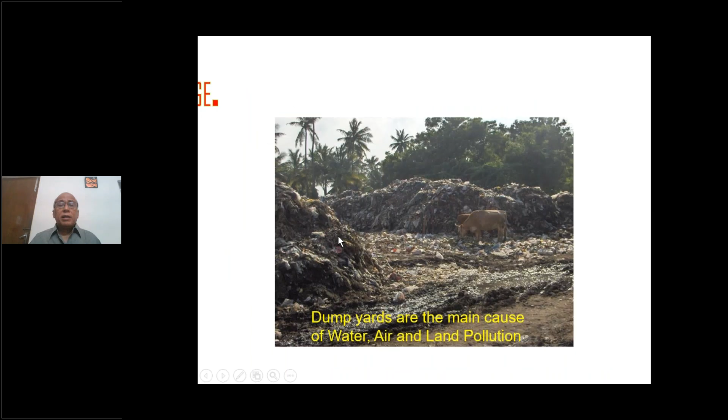Now, the biogas plant is microorganism based. We have all come across this. Biogas, gobar gas, is something that we started off with about 20 or 30 years ago. A lot of gobar gas plants were put up. The process is very, very similar to that. Now, biogas can be made from a lot of inputs: kitchen waste, food waste, plant waste, that is agricultural waste, animal waste, and all these things. We will go over these one by one.

This is something we would like to say: initially it was Stone Age, Bronze Age, and now garbage. We brought this up for a simple reason. Biogas can also be made from the organic part of municipal solid waste, garbage. Dump yards are the main cause of pollution, especially the organic part. The other parts can be recycled. So we can always convert this also to biogas.

Typically, we go by three types of waste: biodegradable waste, non-biodegradable waste, and non-combustible material. In the non-biodegradable part, there is a combustible part and there is a non-combustible part. Our discussion will center only around the biodegradable part. For this particular presentation, we are not concerned about the non-biodegradable part.

When it comes to biodegradable, most organic materials degrade over time. Some things degrade faster and some things don't degrade as fast. For instance, fibrous materials like coconut fiber, drumstick fiber, or fiber of banana leaves take a little longer to degrade compared to material like cooked food waste or vegetable waste. So strictly speaking, it is not a question of time, but the discussion will be on the fast degradable material, and we will try to avoid things that degrade over a longer period of time, like what I just mentioned.

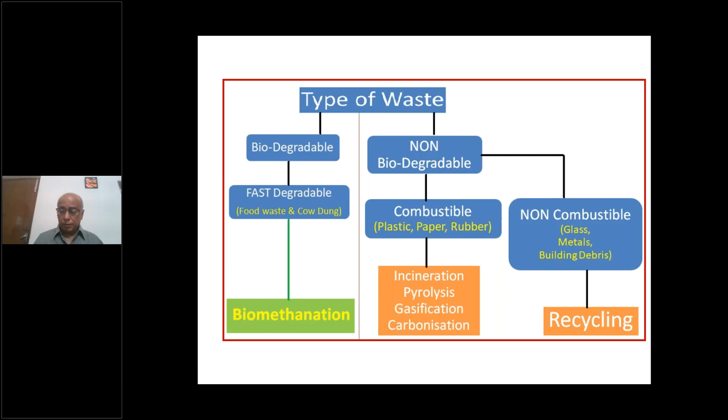So the idea is we want to convert. See, today India is a huge importer of fuel, especially fossil fuel, and it is also a huge outgo of foreign exchange because of that. So the idea is to convert whatever is possible to be converted into fuel, at the same time also minimizing the environmental impact, which is the most important part of these gases.

For instance, if these materials which we are trying to convert to biogas are left in the open, the same methane that we are converting here will also occur in nature. And for your information, methane is 20 to 21 times more harmful to the atmosphere compared to carbon dioxide.

So what we are in effect doing is, strictly speaking, minimizing the impact on the environment, and at the same time converting it to a fuel, and also reducing the CO2 that would otherwise be emitted by using fossil fuels for the same application.

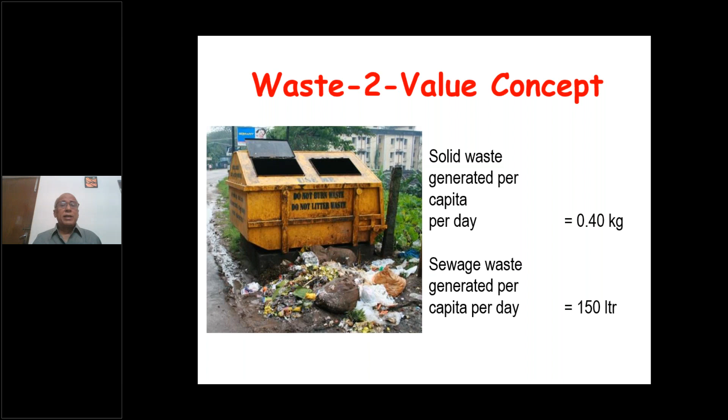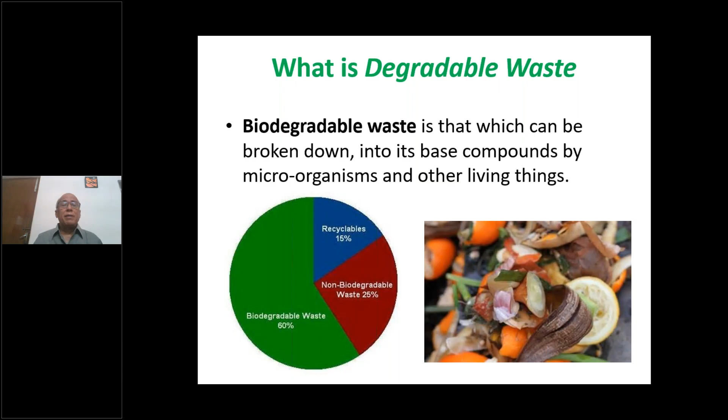So what is biodegradable waste? Something that can be broken down into base compounds like carbon, hydrogen, and oxygen by microorganisms and other living things. So this is what we really are looking for when we say biodegradable waste. Things that can be degraded by microorganisms. So I mentioned to you what is fast degrading and what is slow degrading.

Food waste generally remains of balance of cooked food. You cook in your kitchen some of the food, the vegetable peels and some excess rice kanji or excess rice. These are all part of your day-to-day life. It may be large in volume or less in volume, but there will always be some quantity of food that gets left over in your house, or maybe in a canteen, or in hotels.

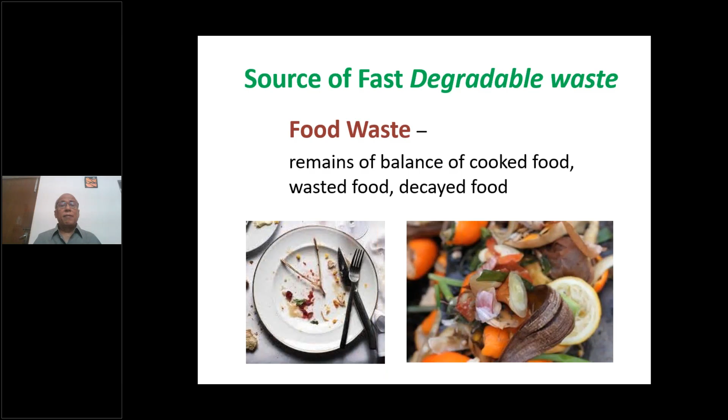So this is one important input, although we are not concerned about this, we are coming only to the agricultural part. So this is one input for the biogas plants. Similarly, water waste: washing of vegetables and grains, the plate wash, the hand wash, and also water waste that comes out of your toilets, if it is not contaminated with your cleaning liquids, can be an important source. What we call biomethanation of night soil is another important raw material for our biogas production.

Then animal waste. This is again very important. It may be part of the agricultural part, as animal husbandry we still believe is under the agricultural heading. So cow dung, chicken litter, fish litter, especially cow dung and chicken litter, also constitute a very important input in converting to biogas. There are already plants, gobar gas, of course, we have all heard of.

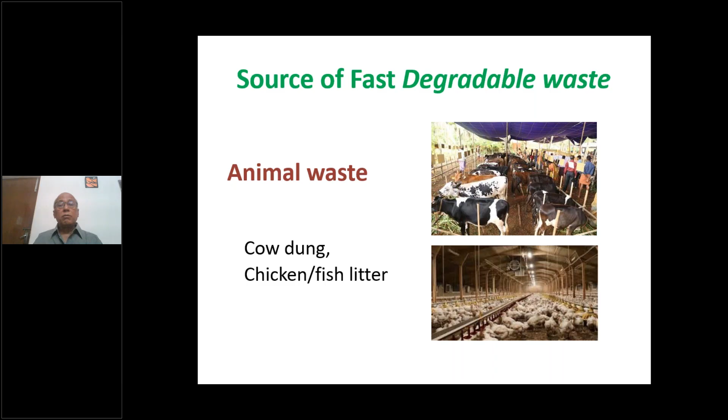Chicken litter has also been converted very efficiently into biogas, and quite a few plants are operational now, even in Tamil Nadu, especially in and about the Namakkal area where chicken is grown in abundance. They are among the largest chicken egg producers in the country today. So in those areas, chicken litter has already been converted to biogas. Cow dung has always been converted to biogas. So this is one important agricultural waste that can be an input for conversion to biogas using the biomethanation process.

Human waste. I mentioned to you, stools, urine. These should be chemical-free; flushing should be ensured. So as I mentioned, if it is not contaminated, going by the good old practice of having a septic tank with no chemical inputs for the cleaning, that would be an ideal method for conversion to biogas.

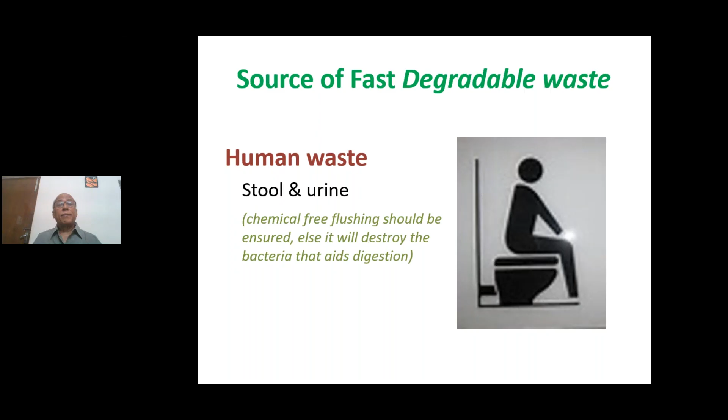Agri-waste is relatively slower degradable compared to food waste and animal waste. Vegetable and fruit waste, strictly speaking, are borderline, meaning they are not very slow, reasonably fast, but not as fast as animal waste. Cow dung, for instance, is highly biodegradable compared to vegetable or fruit waste. But vegetable and fruit waste are a very important component in today's lifestyle, so that would also be a very important input to consider in our conversion aspects.

Similarly, people may want to know, can agricultural residue like rice straw or wheat straw or grass and garden trims be converted to biogas? Yes, they can be converted to biogas, but when they are fresh. If grass is dried, then it may not be an ideal input for biogas conversion. Similarly, dried wood and dried twigs are not ideal candidates. In fact, we should not be putting them at all into the biogas plants.

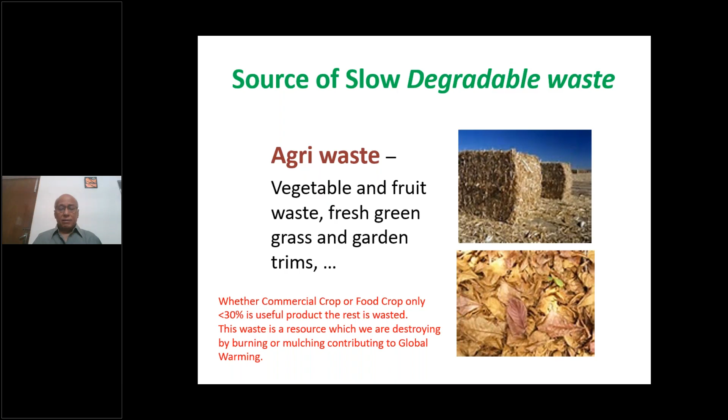Similarly, waste paper can also be used, but in smaller quantities along with other input raw material, not exceeding 5%. So that can also form an input in the biomethanation process.

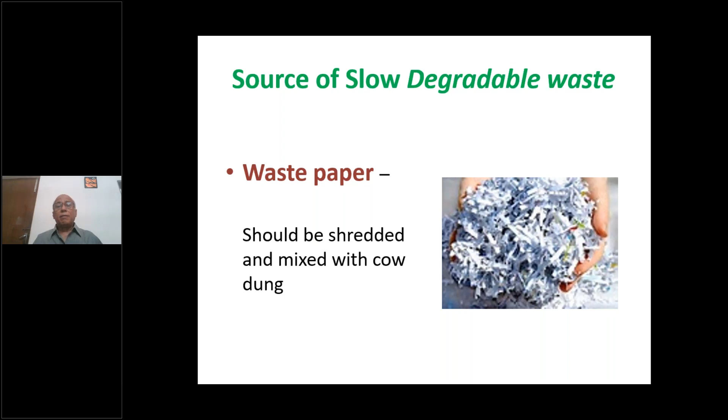As I mentioned to you, municipal solid waste, if it is segregated into organic and the inorganic part, then again, it can be used as a material. In fact, there are lots of plants which are operating. Even Chennai has a plant of 100 tons per day. They are not operating to full capacity now, but based on organic part of the municipal solid waste. And quite a few of these corporations are now in the process of segregating the wet waste and the dry waste, what you call source segregation.

So if source segregation becomes highly successful, which I'm sure is going to happen in a period of time, then the scope for biomethanation of municipal solid waste is tremendous. So probably a few years from now, that will again be a very, very important source of biogas for communities.

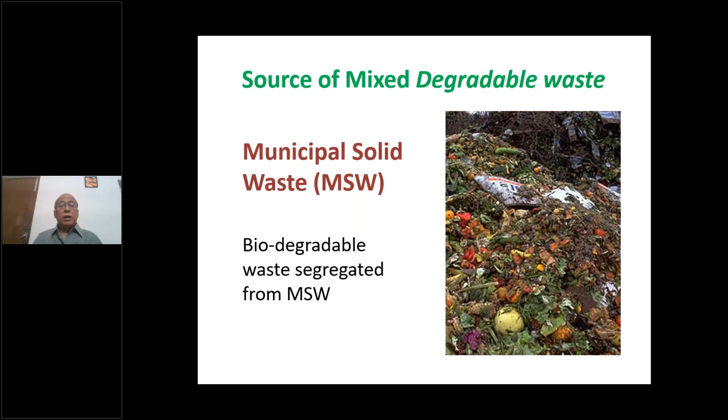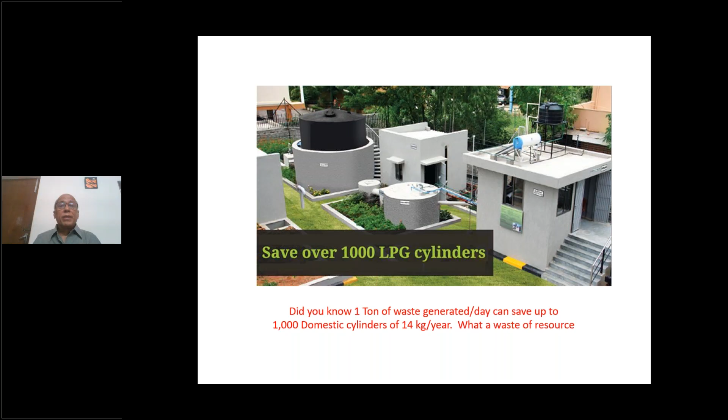So typically what you see, the picture here is a biogas plant that is operating in Wipro. Quite a few people will be wanting to know whether these biogas plants will be very messy, will it be smelling, and all those things. So typically you see this picture here. This is at the entrance of the Wipro campus in Bangalore. So this is typically a process of biomethanation. Let me go over this one by one.

First, the input material, whether it be fruit waste or vegetable waste, it is crushed. The crushing is to a size of about 1 to 2 mm, very small pieces, so that a large surface area is available for the microorganism to act. So you are trying to speed up the process of degradation. So the first step in the biomethanation process is to make the input homogeneous as much as possible by crushing it.

And the kind of crusher that you use will depend on the input raw material that you have. If it is food waste, then you will have a crusher. If it is going to be a little more of agricultural waste like grass and things like that, maybe you may want to have some kind of a tearing mechanism, shearing. So you will have a shearing kind of crusher there.

Now, the process that we generally employ, if you look at the conversion to biogas, the first stage is acidogenesis, meaning there is one set of bacteria which converts the organic matter into an organic acid. Now, that can happen even in the presence of air. Then in the second part, the acid is converted by a different set of bacteria under anaerobic conditions, anaerobic meaning in the absence of air, to methane. So there are two definite steps in the process of biogas production.

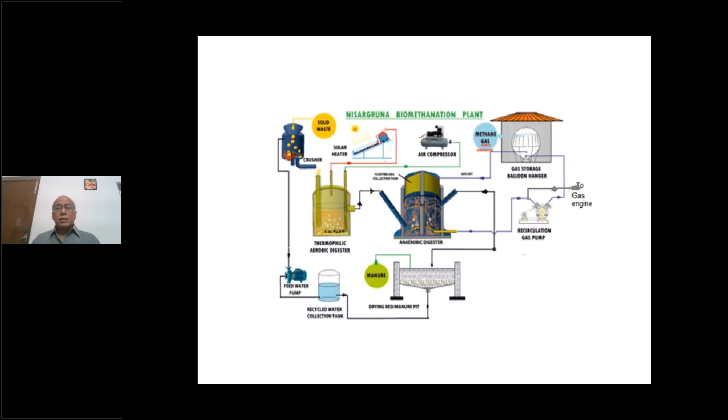So ideally, instead of maintaining a high temperature, which means putting in energy, around 35-37 degrees is the normal temperature at which the digester is maintained. Now, coming to the gas that comes out, it is stored in balloons, so that it can be at different capacities. So typically it is stored in balloons and then used in any end application that you want to use it for.

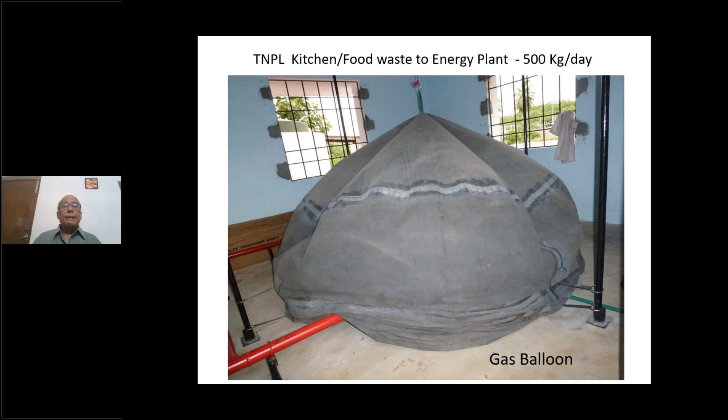So this is typically the biogas composition: 65 to 70% methane, 30 to 35% carbon dioxide. Hydrogen sulfide is another component, something that you don't want in the biogas, but it will happen depending on what input you are putting in. In some cases, we use it without removing H2S, but in other cases, we may have to remove the H2S. For instance, if you are going to use it only for cooking in stoves in kitchens, we generally don't recommend any after treatment. We just store it in balloons, remove the water, and send the gas directly to your kitchen stove.

So there are special stoves which are designed to operate on biogas containing about 55-65% methane and CO2, which will give you a result, depending on the size that you choose, as good as your LPG stove for kitchen application.

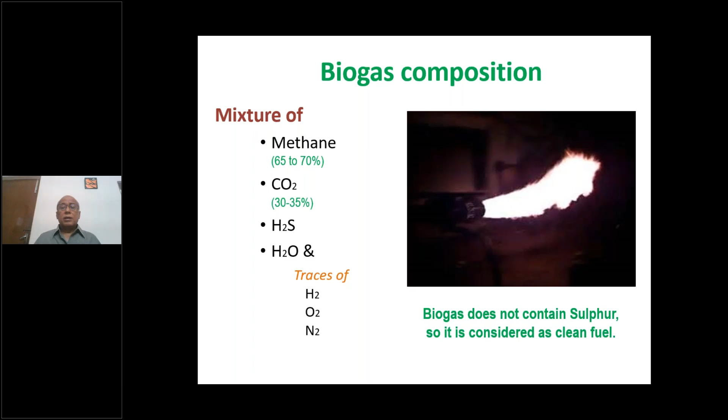In some other cases, for instance, today there is a nationwide movement going on, and the oil companies have taken a lead in this, to use biogas as a transport fuel. It is called SATAT, and all the leading government oil companies are working towards having compressed biogas, which will be retailed in their own pumps and sold as biogas for your vehicles. Today you have seen auto rickshaws running on gas, CNG. Compressed biogas and compressed natural gas are almost the same. Both contain about 90% to 97% methane.

So when I say compressed biogas contains 97% methane, since the gas coming out of the digester contains only 65%, you have to literally upgrade the gas from 65% to in excess of 90, up to 94, 95, even 97%. That means you will have to remove the H2S, and you will also have to remove the carbon dioxide from the biogas. So there are standard processes available, which we call the pressure swing adsorption method, and scrubbing the H2S to bring it to less than 20 ppm. H2S is brought to less than 20 ppm, and the methane is upgraded to 94-95% to be on par with compressed natural gas. So this is what we call bottling of the biogas.

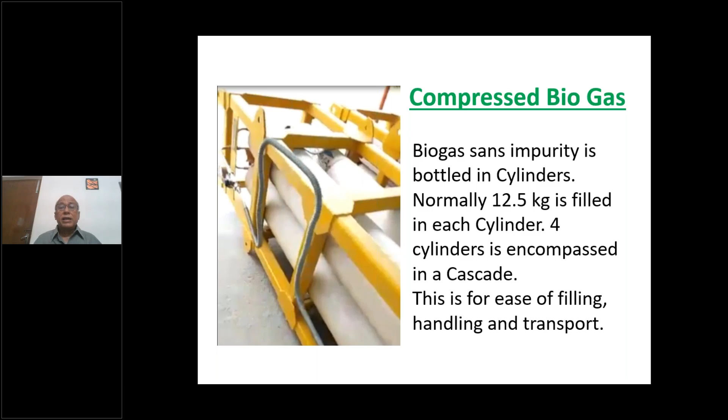The biogas is bottled at very, very high pressure, because unlike LPG, which is liquefied under pressure, methane does not liquefy under pressure at normal temperatures. So we are going to compress the biogas up to 200 kg per centimeter square. That is 200 to 250 times atmospheric pressure. So it is really high pressure compression.

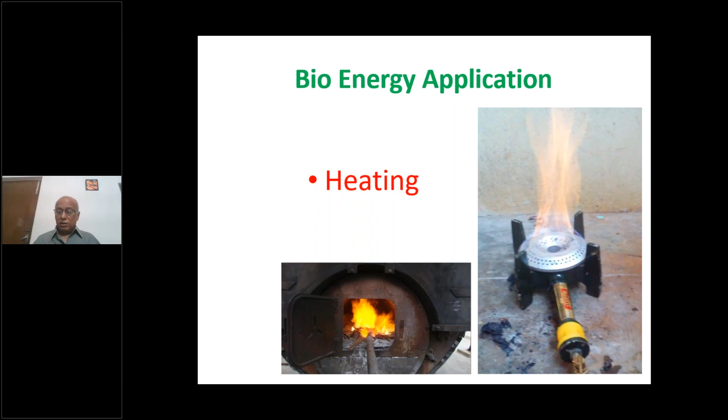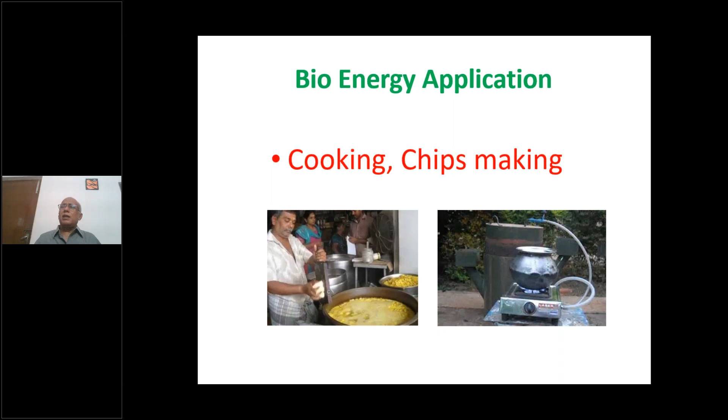Then the application of bioenergy for heating. You can use it in heating. You can use it in boilers. You can use it in kitchen stoves. You can use it for chips making, all industrial processes. Any industrial process where LPG, CNG, or diesel is used can be replaced with biogas, either in its natural form or compressed form, depending on the end use application.

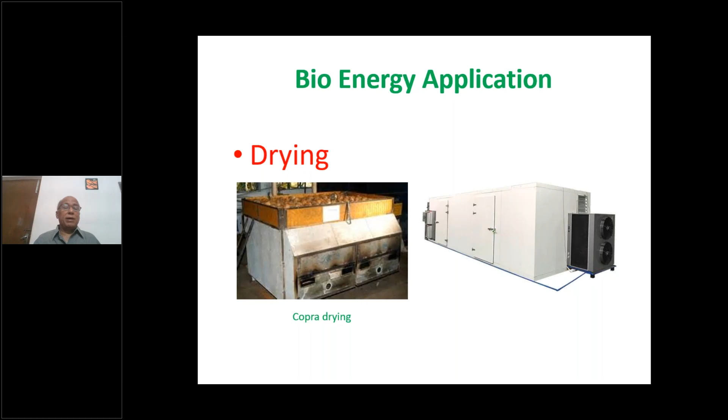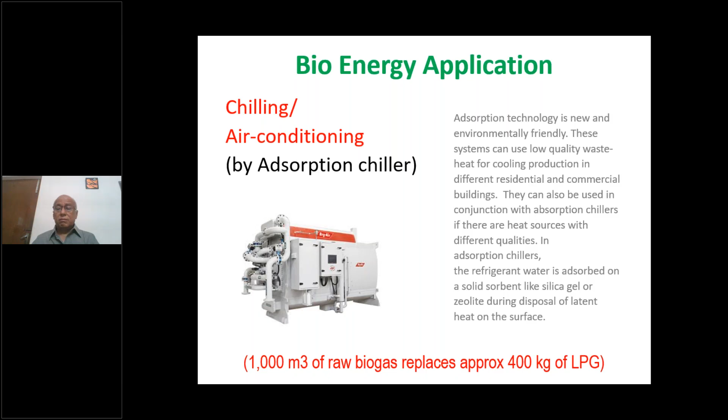Now, drying applications can use biogas. For instance, today biogas plants are operating for coconut drying and any drying operation can happen with biogas. Then you can even have chilling and air conditioning with biogas. This is one more application for this thing.

Today there are gas operated adsorption chillers where chilling can be done. Power generation is standard, meaning there are standard engines available, even Indian engines, so a 125 kVA genset can run exclusively on this biogas. Any CNG plant, any CNG engine will also run. For instance, today you must have all heard of Tata. Tatas are offering buses which run on CNG, and all those buses will also run on compressed biogas.

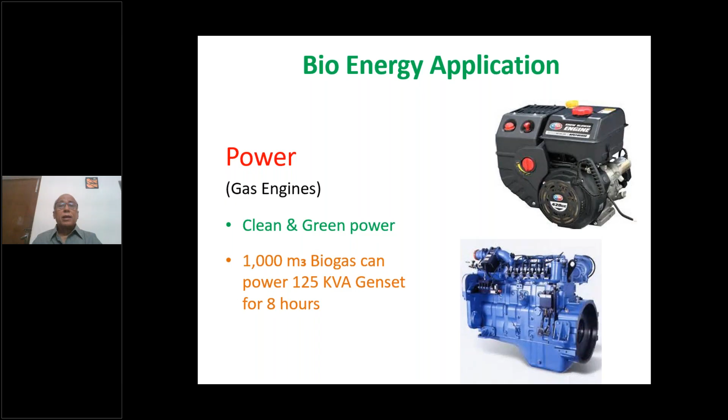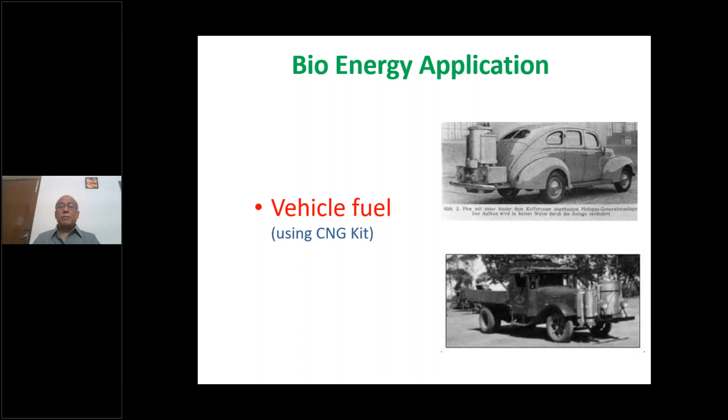Vehicle fuel, I was just mentioning this to you earlier. So typically buses and cars can run on CBG, compressed biogas. In fact, there are already buses operating, especially in the Scandinavian countries, in Denmark and all that. The buses are operating on CBG, compressed biogas. Public transport is run on compressed biogas in the Scandinavian countries.

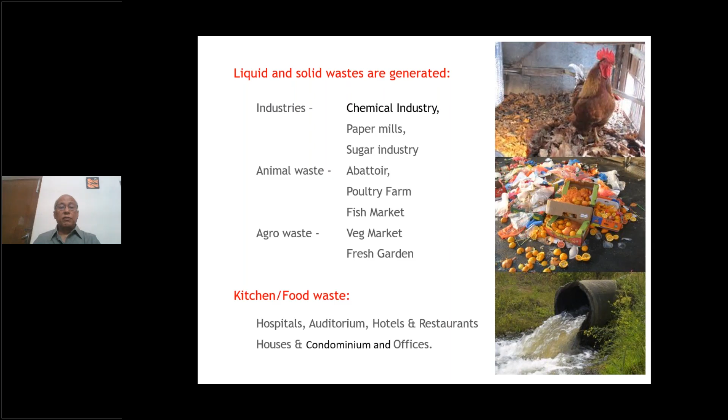So any of these industries which are generating waste, paper industry for instance generates a lot of waste which can be converted to biogas, and they are already doing it also in some cases. Animal waste, abattoir waste is again another thing that can be converted to biogas. Fish market waste, vegetable market waste, fresh fruit and garden waste can all be converted.

So typically you may want to know how much gas will I get. Let us assume you are putting in 1 ton of vegetable waste or food waste. You can get as much as 80 to 90 cubic meters under ideal condition of gas containing about 60 to 65% methane. So this is typically one thumb rule.

If you are going to put in cow dung, for instance, cow dung is already pre-digested, meaning the cow has already had the agricultural input, eaten it, carried out the pre-digestion process in its stomach, and is only sending the totally digested material outside. So cow dung is ideal. In fact, cow dung will form the source of our input stock, that is the bacteria for conversion.

So when you want to start your biogas plant, the first thing we do is add cow dung to the system before we start adding the regular waste. And from time to time, if you want to improve the bacterial population in your biodigester, you can also add cow dung to improve the population of the biodigester.

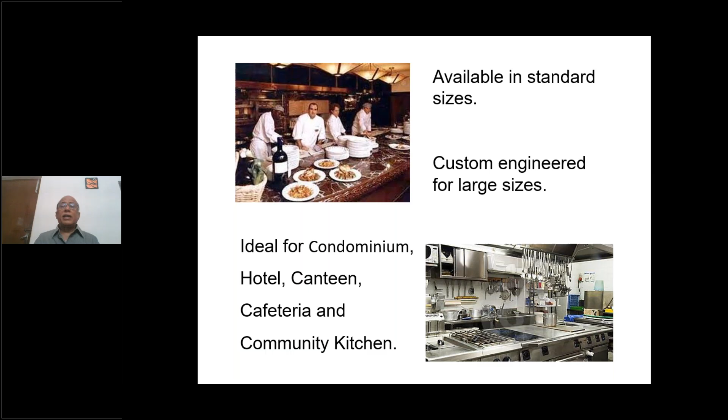Okay, so we have standard models. Most of them are specific design, but smaller plants like 100 kg, 200 kg, 500 kg, 1 ton plants are almost standard today for making biogas.

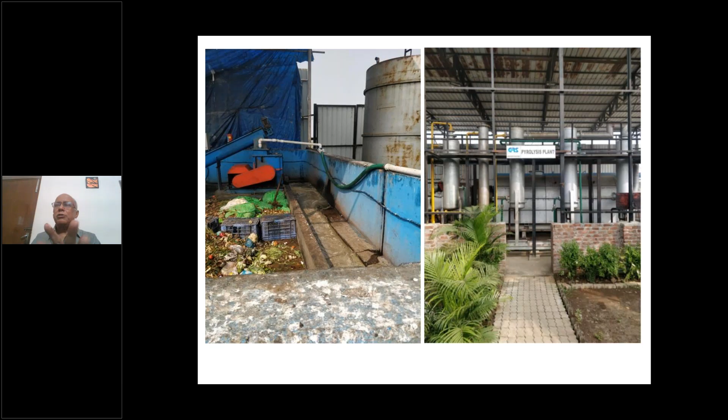And like I told you, the sorting table is there. In the sorting table, generally when you are talking about waste, what happens when you put in material that does not digest? When you are collecting food from the market or waste from the market or from the canteen or anything, a lot of other unwanted things will also go into the digester.

For instance, let's say you have a canteen. In the canteen, sometimes spoons and other material like eggshells can get added. Eggshell is again something that does not degrade very fast, like drumstick fiber, coconut shell, or coconut fiber. These are all things that don't digest fast. So generally, for a small plant or even large plants, we try to manually remove these contaminants before we feed it into the grid.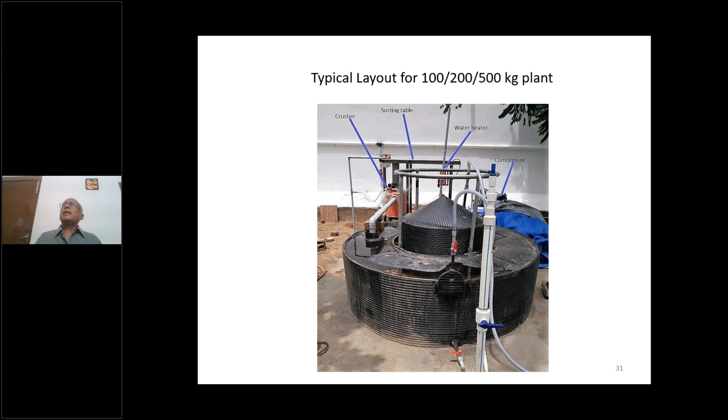Okay, so this is typically a picture. You can use this as I mentioned to you.

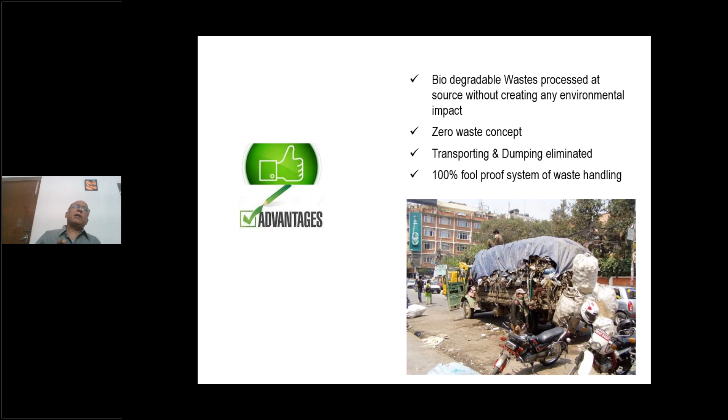There is no waste in the sense that you can put up these plants in typical markets so that the waste generated in the fruit and vegetable market does not go out. You can have your own biogas plants within the market itself. The gas can be used to run a chilling plant so that you can also have a cold store in the market itself, so the vegetables do not degrade very fast. These are all ideal conditions. People are now working towards putting up these plants in the market to convert the vegetable waste generated there into gas, and also provide a cold store so that the sellers can store produce in the market. It doesn't degrade very fast, so the wastage is minimized.

So this is typically the underground plant. You can have it underground or overground, so space can be minimized. There is nothing else involved, meaning the process is natural. Once you feed the material into the pre-digester, crush it and feed it, there is no need for any manual intervention down the line till the gas comes out.

And besides the gas, you also get a digestate, meaning what is left over after digestion, which is an ideal fertilizer. It can be liquid or solid fertilizer.

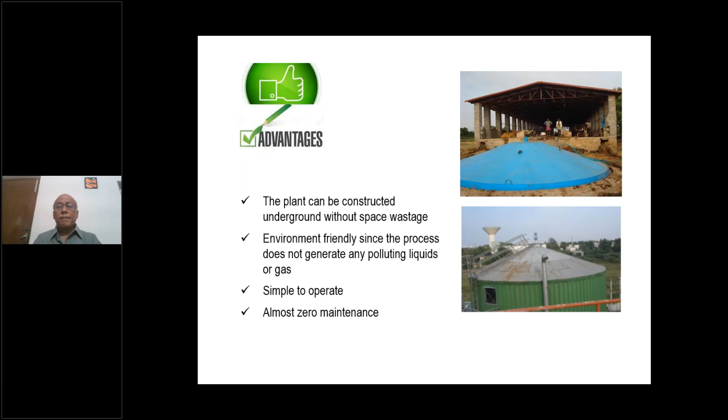Today the technology is proven, meaning there are no ifs and buts about whether the gas will come or how much will come. For a given set of inputs, you can tell clearly how much gas you will get.

The process is very eco-friendly. The maintenance, it's not exactly maintenance free, but very, very low maintenance. In case you have a compressor, or especially when upgrading the gas, there are some machines involved other than the digestion part which may require some maintenance. It's highly cost effective because nothing else is required. I wouldn't say no electricity is needed, but under normal conditions no electricity is needed to generate the gas. For crushing, if you put material in without crushing it will still generate gas, but we crush it so the process is speeded up. So there will be minimum electricity required, minimum maintenance. It is self-sustainable; you don't need anything else.

And the plants, like I told you, are aesthetic. You can put it up - Wipro has put one up right in front of their entrance - and nobody will even know that there is a biogas plant operating at that location. No mosquitoes, no odor, nothing. It will be very clean.

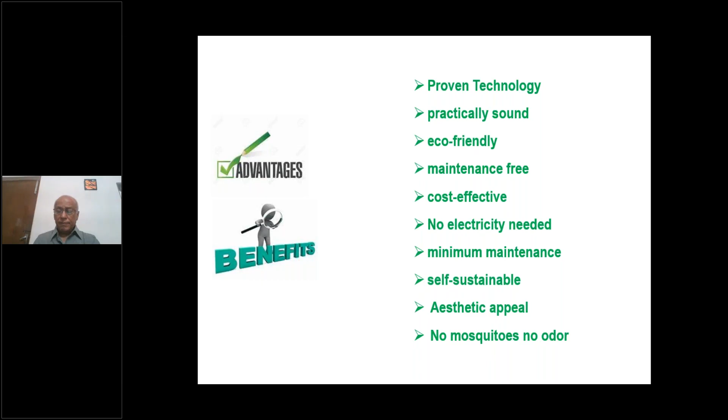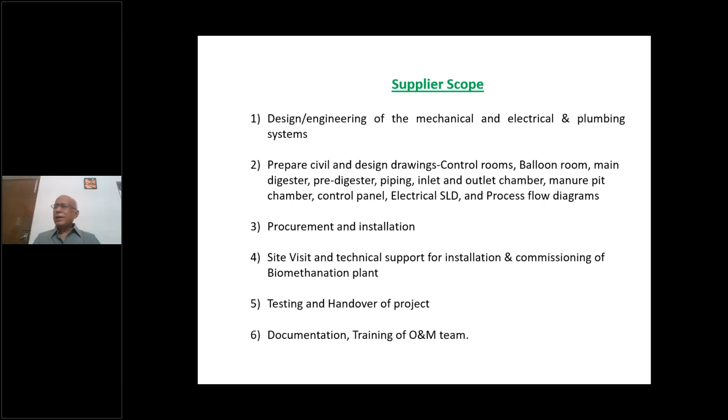So, as I mentioned, by putting up these plants we are contributing to the reduction of global warming in a very, very large way. As Acclaim, we give you end-to-end support, from designing the plant to incorporating it, erecting it, and in some cases even selling the gas if you want.

So here's a case study: this is typically the Wipro Bangalore plant I told you about. It's a 500 kg per hour plant, using food waste from their canteen and also supplying gas back to their canteen.

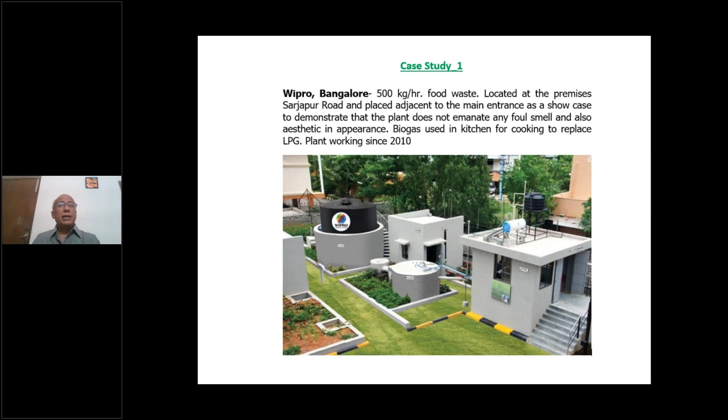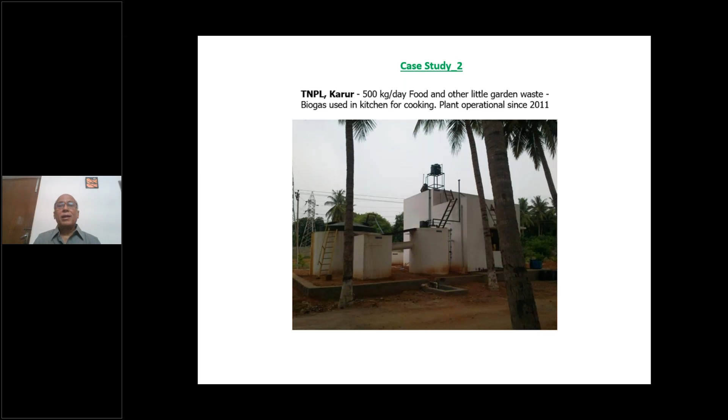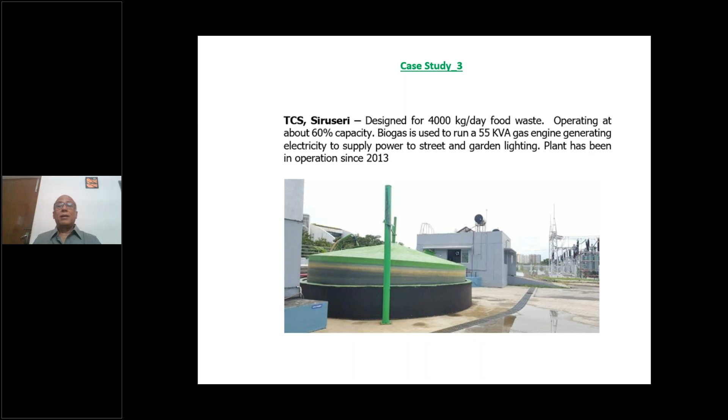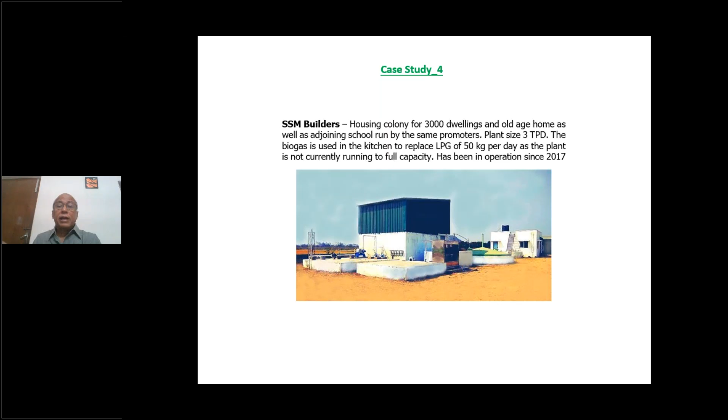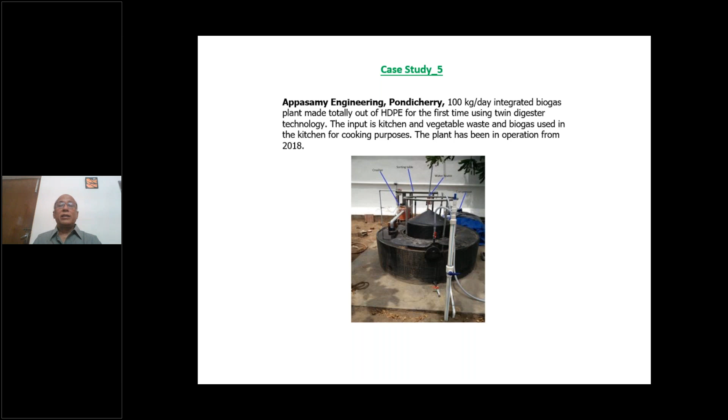This is a very small plant, a 100 kg plant. We are showing this largely for you to get an idea of what a small plant will look like. It's totally compact, can be moved anywhere, put up anywhere, even on the terrace without any problem. You can move it from one place to another. This particular one is for a small engineering company in Pondicherry, using it in their canteen for 100 kg per day.